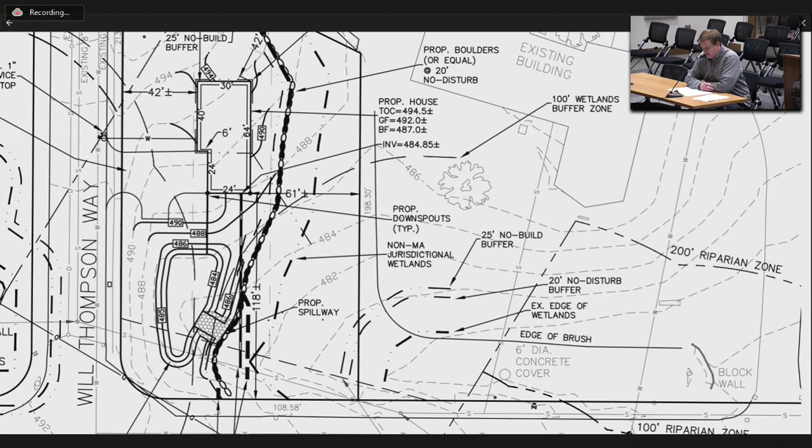We point that out on the lower right-hand side of the screen in front of you, and it would lead down toward that drop inlet adjacent to the retaining wall. There was another area, the man-made drainage channel that leads from the parking lot down toward this swale along John Fitch Highway. There was some question about whether or not that was a wetland or how that fell within the jurisdiction of the commission. So what we agreed to do is flag that as a non-MA jurisdictional wetland at this point.

We show the 20-foot no-touch buffer that the city has, also the 25-foot no-build zone with that. And as part of that no-touch zone, there was a request by the commission that some kind of monumentation be put along that 20-foot no-touch zone, so that it's delineated for the homeowner in the future that the area between that and the existing drainage channel is not supposed to be disturbed.

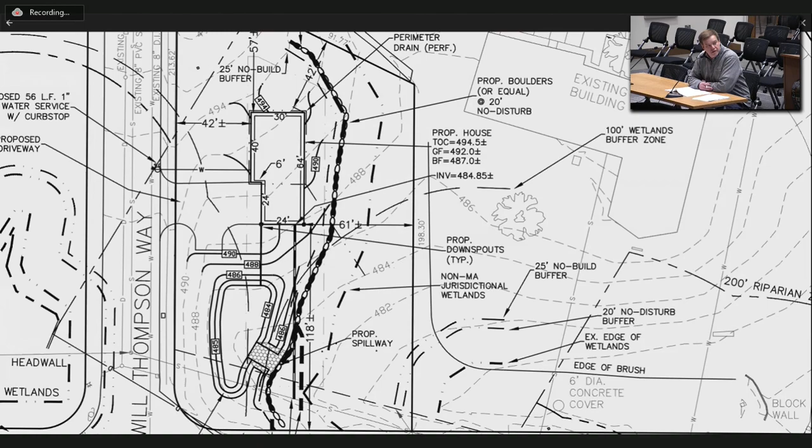So that's what we're showing on the plan - right now a boulder wall or delineation there, and we do show it as 'or equal.' I know in the past the commission has used a few different ways to delineate that 20-foot no-touch zone, so we want to leave that flexibility for the applicant to choose which monument option, as allowed by the commission in the past, would be easier to create that visual barrier for the future homeowner.

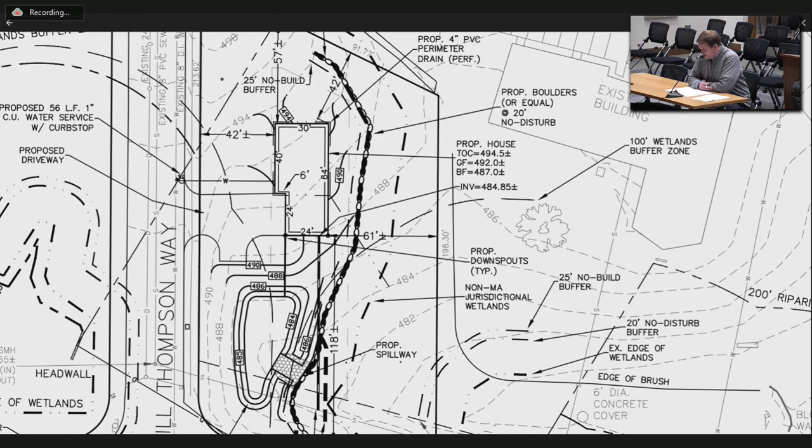We did slide the house up a little bit to the north, about 15 feet or so, closer to the northerly property line. This allowed us to create some more space on the southerly side to fit in the proposed detention basin out of the 20-foot no-touch zone.

We do show grading on the back of the property up to that 20-foot no-touch zone where it's field now, and it'll be lawn afterwards. Anything outside that 20-foot no-touch zone will be a lawn area or even some of the field area like it is now, in the northerly corner.

We feel that the proposal in front of the commission is what the commission members were asking for at that site walk. I think it meets what the commission members and Tim were looking for from a standpoint of protecting that drainage channel that has some wetland plant species in there now, to allow it to continue to operate the way it is.

One thing we do ask, and we talked about on the site walk, is that the drainage channel still be allowed to be maintained if any silt builds up there, or anything stops it from conveying the stormwater the way it does now, so the landowner or the church has the ability to continue maintaining it, making sure there's no blockage within that drainage channel that would negatively impact their parking lot to the north of it.

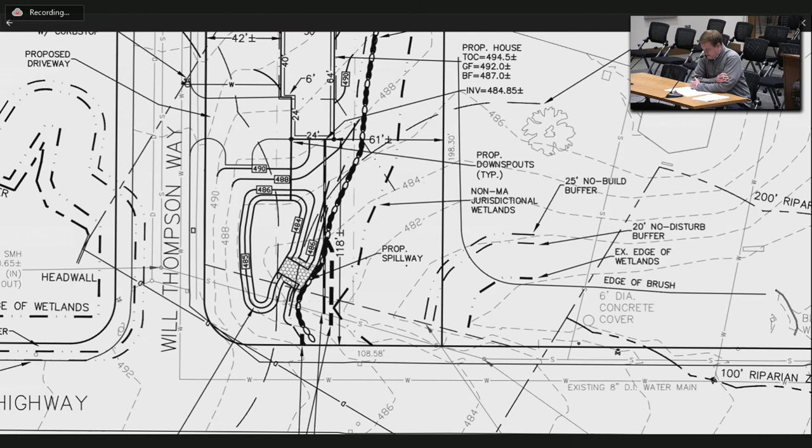They would do a minor trench to get that sewer service in, then restore the trench and make sure it goes back to a field as it is now. But because of where the sewer inverts are, the sewer elevations within that sewer run, and where the sewer ideally would want to come out of this house, it makes sense to tie in the sewer in that location, so as not to negatively impact the detention basin.

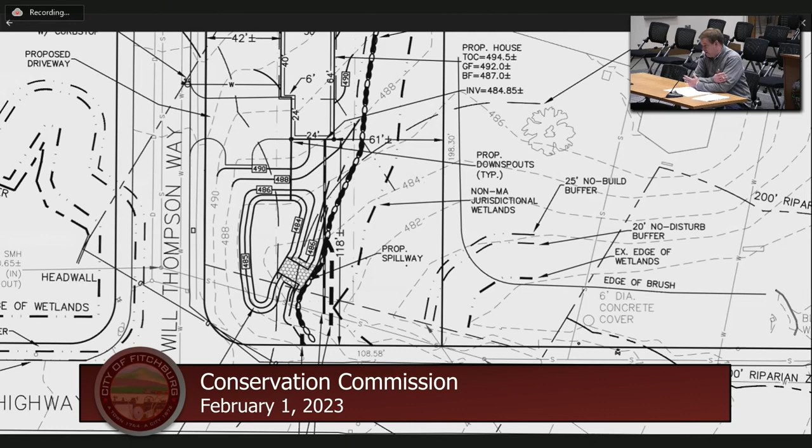That was one thing I wanted to point out to the commission. Like I said, after construction is completed, that will go back to what it is now, really that field meadow area, used as a drainage conveyance channel. I'm not sure if any of the commission members have questions or comments.

Madam Chair? Yes, I just have one real quick question. So out in the field west, we moved some stakes around. Is the delineation shown on the plan consistent with where the stakes were moved to?

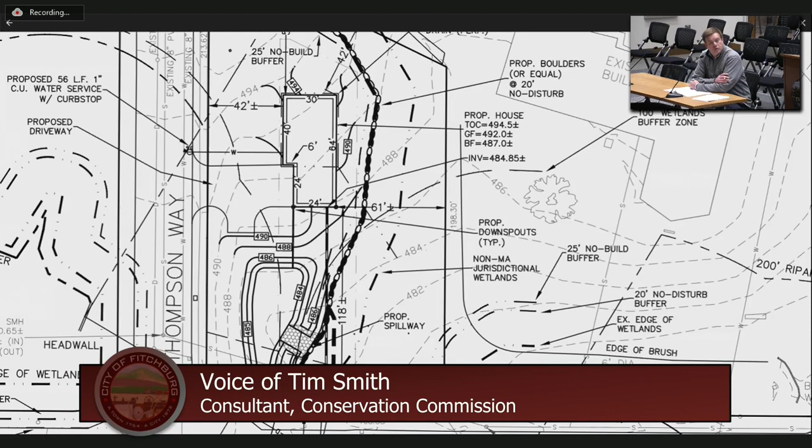Correct. What I did is I left those stakes where they were. Matt went out and looked at where the stakes were. He didn't have an issue with the stake locations. He threw a couple extra flags intermittently, because the stakes were spaced 20, 25 feet apart in a couple locations, so I think he threw one or two flags down.

And then in the lower area where we show it as an actual jurisdictional wetland, he threw, I think, 5 or 6 other flags down in that location along the swale along John Fitch Highway. But yes, the stakes that we put in the ground during that site walk, Matt did verify those, and he was comfortable with the locations.

Very good, thank you. And there were a couple areas where he thought he could move it a couple feet here and there, but it didn't really matter at that point. We left it the way we staked it because we don't want any conflicts with regard to that — it didn't make much of a difference, a couple feet here and there.

I think one of the commission members had a... would anyone like to speak in favor of or against this hearing, or would like to request more information? Please state your name and address for the record. Do we have anybody in person? Please, come on up here. Thank you.

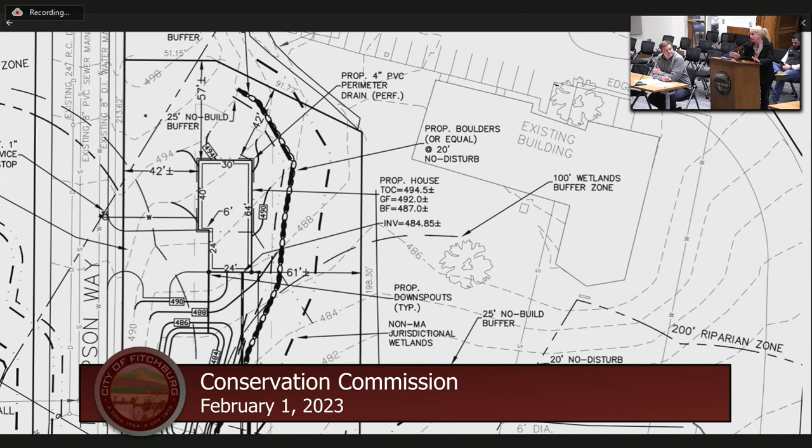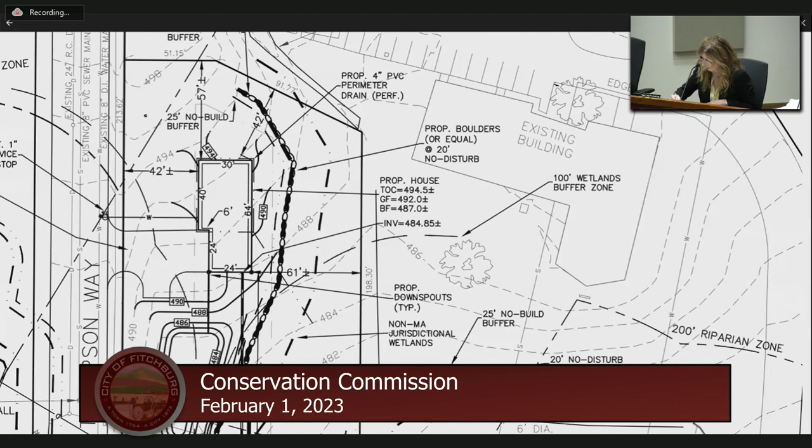Hi, can you hear me? Yep, you can now. Yeah, thank you.

I was listening to the person that spoke earlier too, and I'm looking at the driveway here. A lot of what he was saying about the driveways up on McIntyre was that after they were put in, the water was forced to go a different way and it came across the street. I think that's what the people on Will Thompson are thinking, that the driveway and the housing, even though the water doesn't go that way now, when you build, and you'll probably have to blast because of the ledge that's there, it will go across the street.

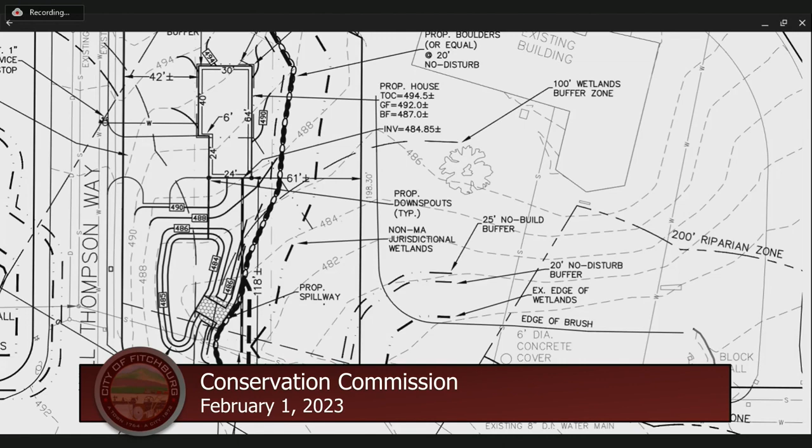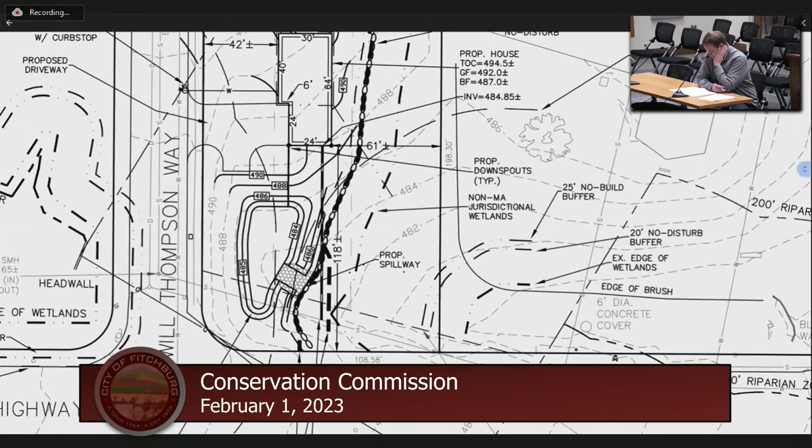Does this culvert at the bottom down towards John Fitch go under the road and then into the pond, or does it just go into the sewer? There's a culvert underneath, from Will Thompson to John Fitch Highway, and into Falulah Brook. That connects the two sides of the river there. Then the river eventually goes down to the little pond, to Putz Pond.

We're not touching that culvert. We're not touching that section there.

Just so you know, the driveway grading is proposed to continue the water flow in the direction it does now, where it stays on the property and toward that drop inlet at the driveway into the church. We're not required to force our driveway runoff into that detention basin. The high point in the street currently along Will Thompson Way, along the right-hand side, basically the backside of the property the city owns, is going to stay there, and all the water currently on this property goes toward that catch basin or drop inlet next to the driveway for Emmanuel Lutheran Church, and that's going to continue after this project.

And also the buffer zone - is it going to be 25 feet on that lot from beginning to end, or just behind the house? There's a 20-foot no-touch buffer required by the city, and we're providing that. The 25-foot no build is no structure - we're not in that 25-foot no structure zone, but we are doing some grading within that 25-foot no structure, no build zone.

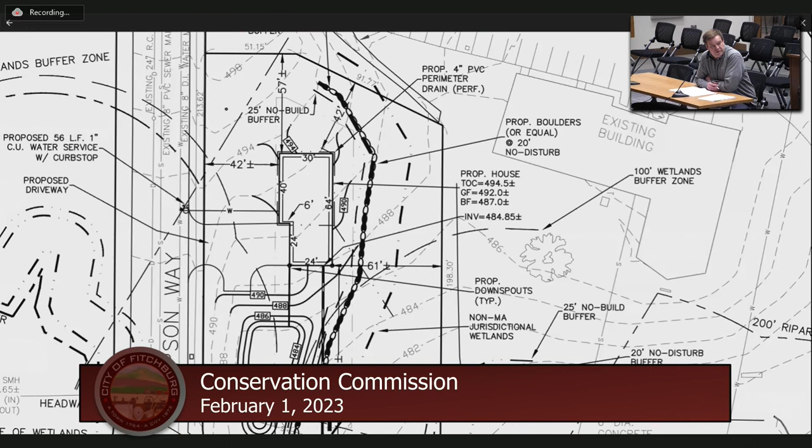And those boulders that are going down, they're not the little chain link thing - that's just there to provide a physical monumentation of that 20-foot no-touch zone so that the future homeowner will know that's the limit of where they should be disturbing, the limit of where they should have their lawn. I have that across the street from me here.

Does the commission have a standard condition now for how you would handle that? I think that's worthy of discussion later, is that what the commission wants? That was my question.

Is Mrs. Solomito done? Yeah, that's okay, I'm done. Thank you. I did have a question about that barrier. But do we have any other?

I'm not seeing any other hands raised unless Matt has something to say. Mr. Morrow, good evening, do you have anything you'd like to add? Can you hear me now? Yes, now we can, Matt. At this point, no, I have nothing to add. I think Wesley covered it. Thank you.

Okay, hearing no more from the public, let's turn to the commission. Do we have any commissioners that have questions they would like to direct to Mr. Fliss?

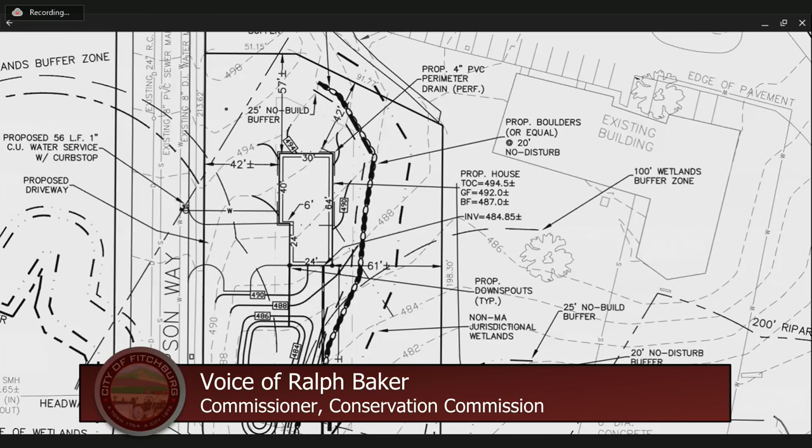I do, go ahead Dr. Baker. Mr. Fliss mentioned something about a sewer line. I don't see in the plan that is appearing right now on the screen any indication of where that sewer line is. Am I missing something?

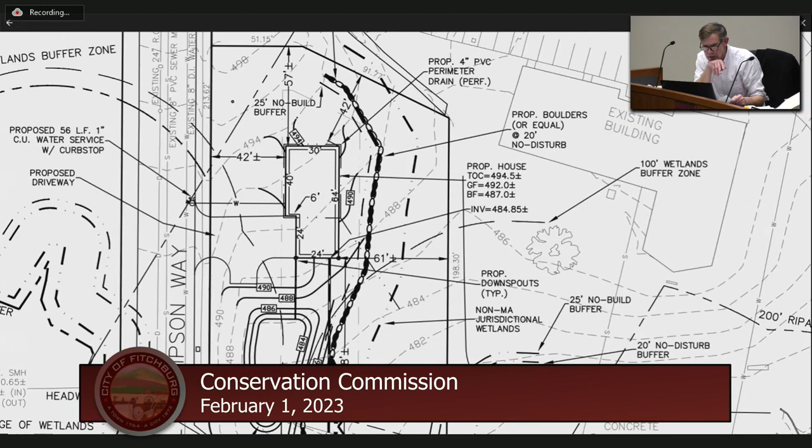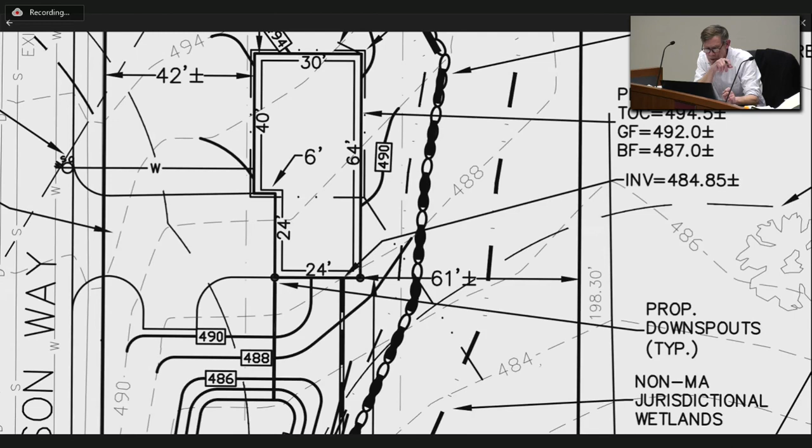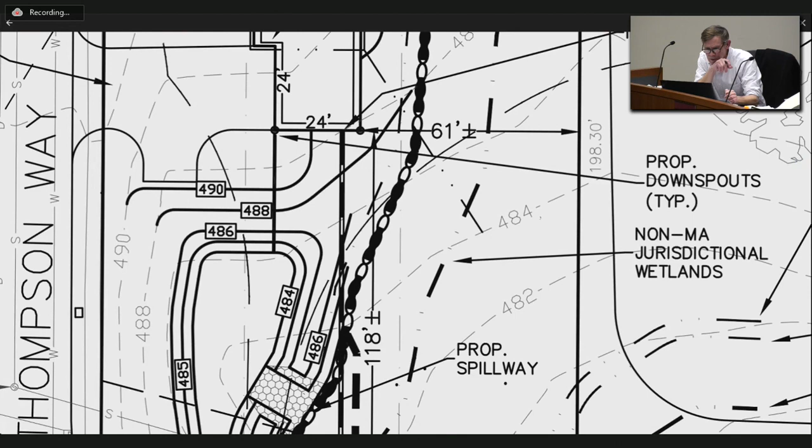Yeah, it shows - there's a dark dashed line running from the side of the house with the dimension 24, going straight down the screen, on the right-hand side of the house. There's an existing sewer main that runs underneath, and we're just tying into that. It's labeled at the bottom there with an invert elevation. I see, okay, thank you.

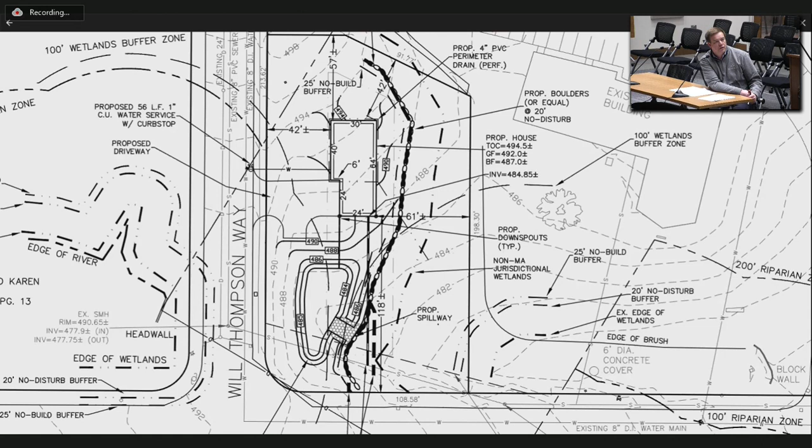Like I said, once it's installed, they'll restore that property back to where it's supposed to be. It's not exactly intuitive, Joyce, trust me, trying to figure it out.

Are there any more commissioners that have a question or comment? Joyce, go ahead, Commissioner Jacobs. Wes, thank you very much for updating the plans. I just have a couple of questions.

When you say boulders or equal to, are you leaning towards one or the other? There was a lot of conversation about this, I think you guys had mentioned there were a few different ways you've done it in the past. There were granite pillars installed that we did at another applicant.

But we also want to make sure that when you do that, we will put in perpetual conditions that somehow it has to be memorialized with verbiage attached to that monument or those stones, saying it's in the resource area, no alterations. Do you guys have something similar, like a little placard? I know some communities have.

Yeah, we do. We have a box of them in the office. And that's fine, whatever we put out there, we'll make sure we have the little placards on there. We don't have an issue with that.

Okay, beyond where you're showing the stone now, I'd like to offer that we also memorialize that 25-foot no-build, at least in two locations on the church side. When you get to the 25-foot no-build buffer there in two locations, so that someone's not going to come down into the wetlands and alter that, now that we've marked that off as a no-build area.

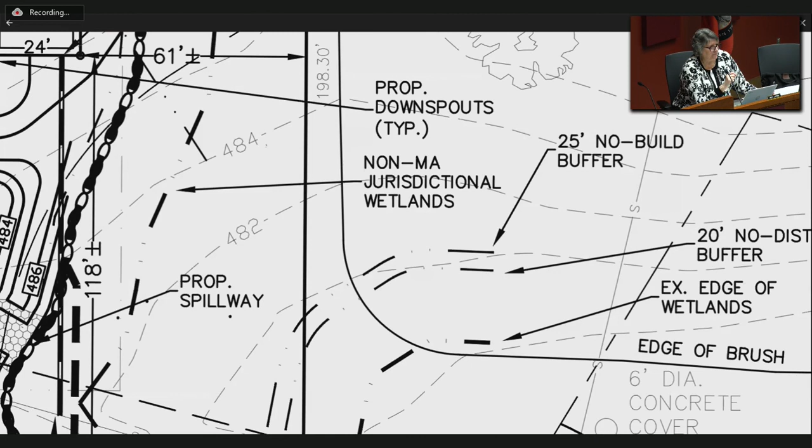Right there on the screen, where it says 25 foot, so as you go across, we would want a marker there. We would want to mark the 20-foot though, because at the 25-foot they could technically put a... I would say 25 foot, because it says no build, they're not going to be able to do anything anyway.

If you look at the definition, no build means no building or no structure. The way the regulation is written, the no-disturb zone is the area they can't touch, so we should do it at the 20 foot.

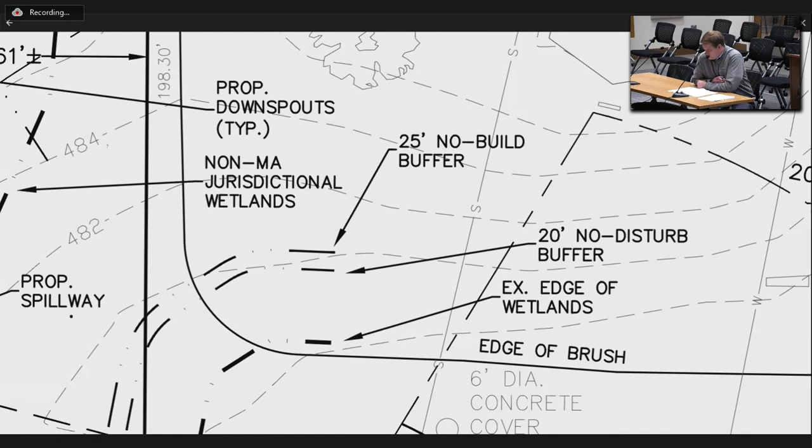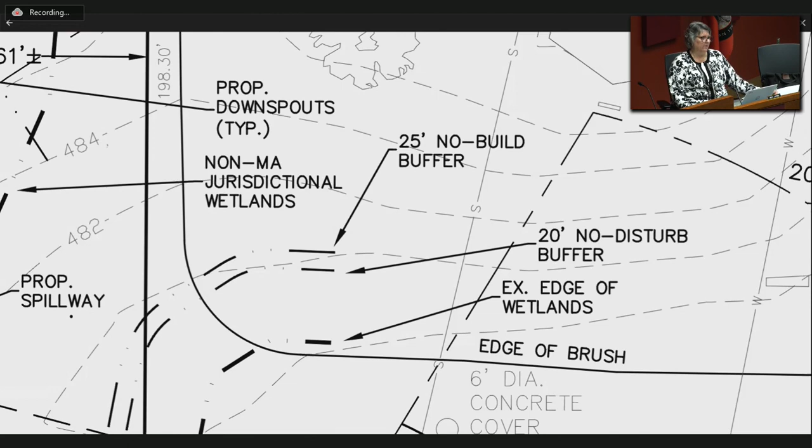I'd like to see at least two markers in that area, because that's a fairly long stretch. We'll go over the plan so that the final plans indicate that, so you can put one where your arrow is right now, where it says 25-foot no build, and then come down towards the driveway on that same plane and put in the 20-foot buffer mark there also.

So that we're delineating that buffer, and we will include in the perpetual conditions that they, as we talked about, can mow it or clean it up twice a year, so that it can be maintained, both the drainage that comes down from above and this area. The drainage basin will need to be maintained as it was originally designed.

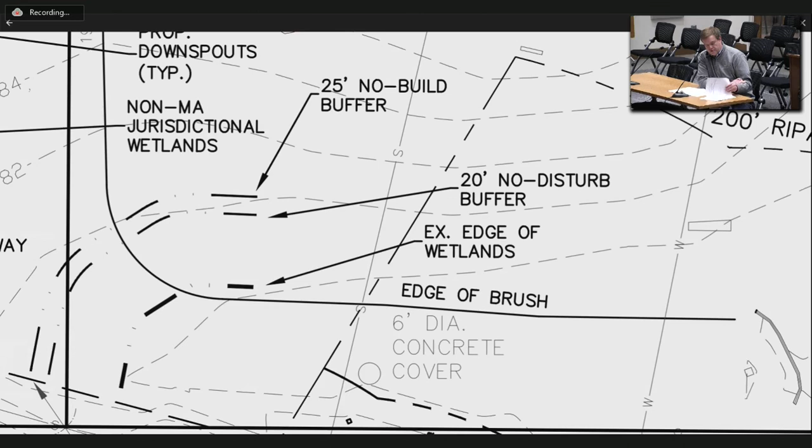That'll be in the order of conditions. And so we did provide a maintenance schedule for that basin, when I sent over the calculations to Nick I also included a maintenance schedule. I know in the past the commission has just included that as part of the order, I'm not sure if that's something you would do again or just reference the drainage calculations.

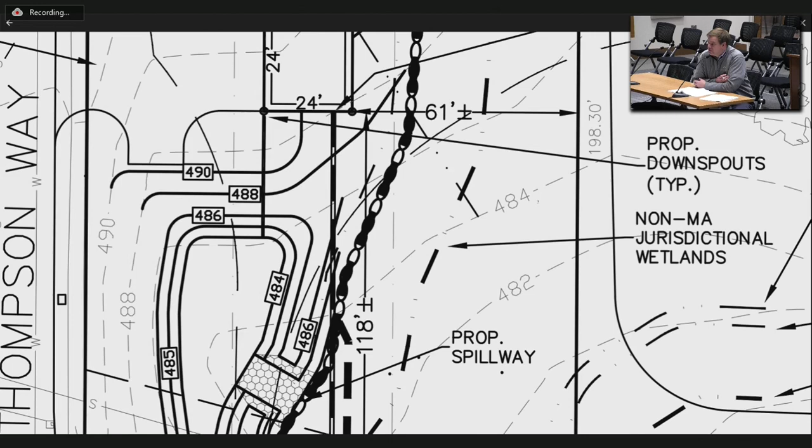Well, Nick is here. I know he sent me an email toward the end of the day saying that because of the winter conditions and storm damage and cleanup, he hasn't had a chance to really review, nor has Jeff, the calculations that you sent him.

I know, do you want to hear from Nick? Sure, you still with us, Nick? Yep, I am. So I took a really quick look at this this afternoon.

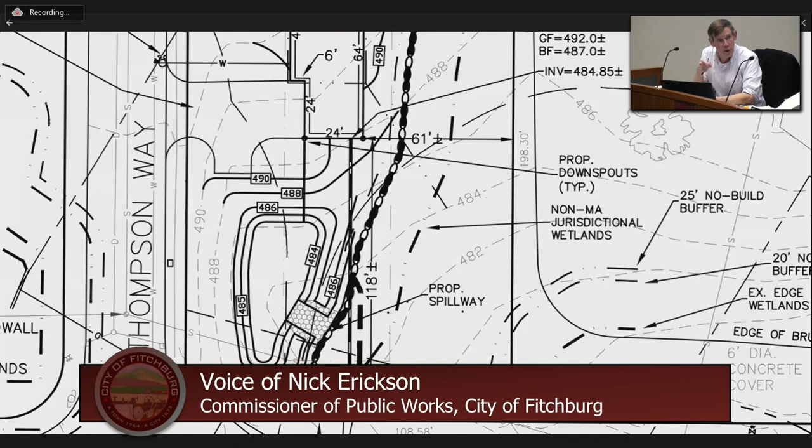I'm fairly comfortable with everything that's shown. I would like another day or so to go through the actual calculations and just make sure everything's in order, but I expect to have some time to do that by the end of the week. So assuming everything checks out, I can just send an email to Mike and Mr...

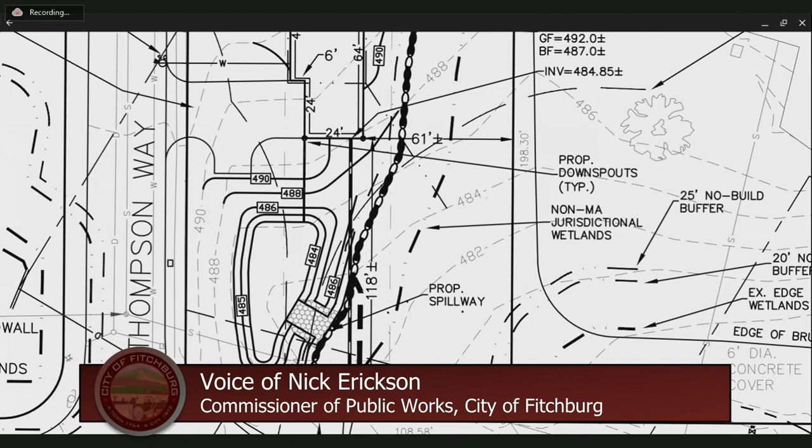Fliss, let them know that everything's okay. If I have any other questions, I'll email and get them clarified. But just from a 1,000-foot view, everything looks good so far. Best send it to my Gmail account, Nick, because they're going to turn mine off, okay?

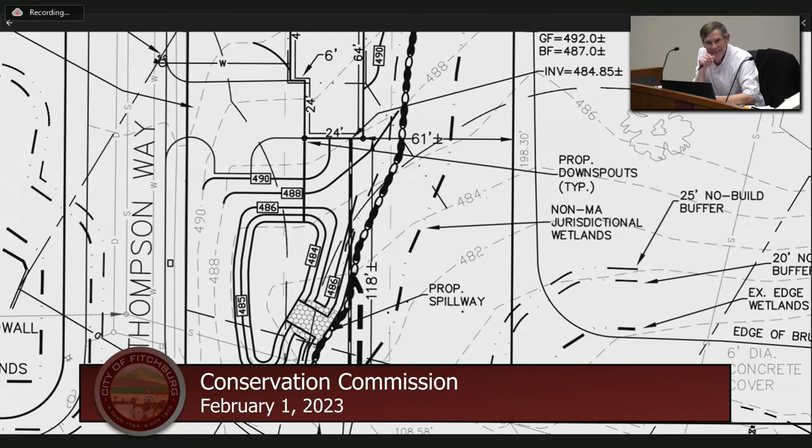Wes, can we also put a marker on the plan, in and about where the elevation mark is for the 490, which is just near the detention basin, that we're going to instruct as part of a condition should be marked as an area where no alterations are to be made.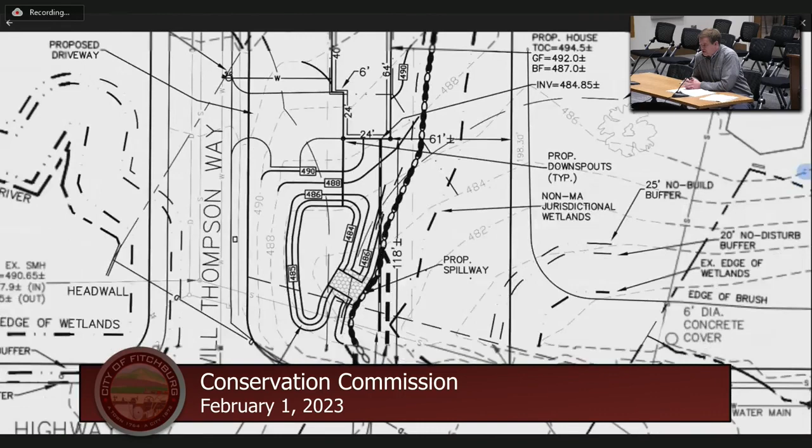It's going to be in the order of conditions. It's going to be lawn, so anything outside the 20-foot no-disturb zone to the wetland, we have no problem. But now I'm talking about around the basin. They should be allowed to plant if they want, or landscape up on top there.

We talked about this when we were there. They should only be able to maintain it a couple of times a year just to keep the overgrowth down. Between the 486 and the 490, it's going to be lawn, so they should be able to mow it when they mow their lawn. It serves no other purpose other than just lawn at that point.

The basin part of it is 486 to 484. That's the basin part, usually maintained a couple times a year, allowing it to grow a little more wild. But anything above it doesn't serve any purpose from a drainage standpoint, so I would ask that to be just lawn, so they can maintain it as regular lawn and it doesn't look unkept.

So how do we let the potential homeowner that's going to take over this lot know that it cannot be altered in any way?

Well, it's going to be in the order of conditions that the drainage basin shall be maintained as originally designed. Are we comfortable that that's enough? The maintenance plan can be attached to it too, so they know what they're supposed to be doing for the maintenance of the basin.

But that part that you're talking about is the lawn. That's part of the lawn, has nothing to do with the basin itself.

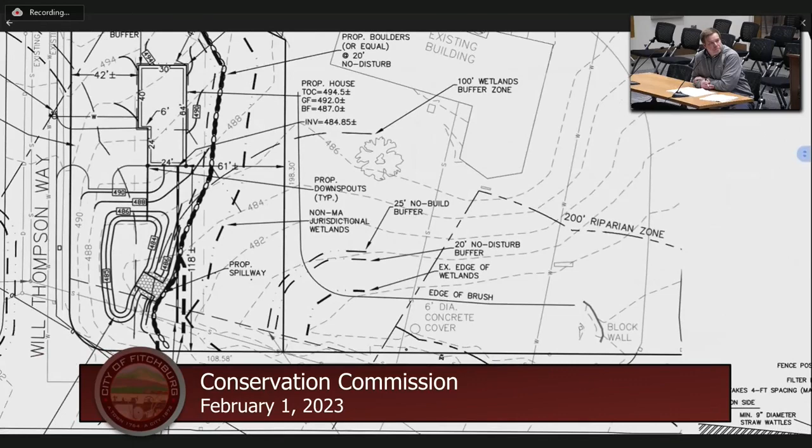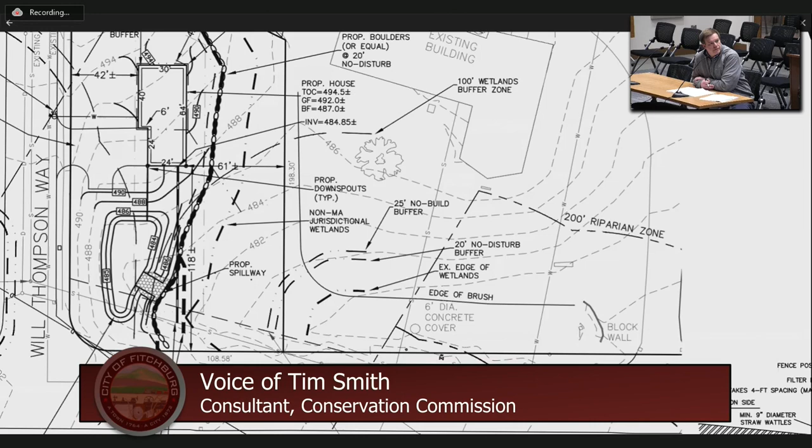Joyce, I hear what you're saying though. We had another project where the homeowner brought a lot of fill in and filled the detention basin to plant a garden. A lot of folks look at it and say, I've got a hole on my property. But that detention basin is going to be vital to prevent the flooding that the neighbors are concerned about.

So it does need to be protected in perpetuity and maintained. The only place they should have any monumentation is at the no-disturb zone, outside of that no-disturb zone. But we can put a perpetual condition that says that detention basin should remain, and that the maintenance plan should be adhered to.

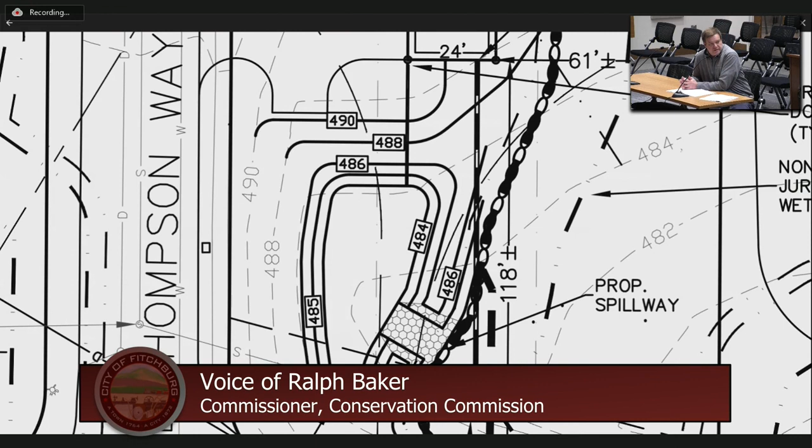So, Tim, can we get an agreement as to what can be considered the detention basin and what isn't? Would it be the 486? Yeah, 486 is the contour of the basin. Okay, that seems reasonable. Plus the spillway, correct. So that should be clarified within the order of conditions, I think.

Detention basin and spillway, Dr. Baker? Yeah, as designated by the 486 topographical line on this plan, which of course could be reestablished with a survey if you're wondering where it was, but also you can just tell because the slope will drop off there. And Wes, I know this is all going to come with the lot, but...

As Tim talked about, a lot of people don't read that stuff, and they think they've got a depression in their yard, so they want to fill it in and plant a garden, and we don't want that to happen. So I'm trying to figure out the best way to make sure that information is relayed to the new owner, no matter what we're talking about, basins or backyards close to wetlands.

If the homeowner doesn't know about this from day one, a lot of times you have issues. It could be a matter of just filling wetlands. So I think making sure it's in the deed, and then making sure that's always conveyed in the deed. A lot of times the order of conditions is going to show up when they do the title research every time they sell this property. So yep, it's usually a red flag if there's an open order or these attachments. The property owner should be aware of it.

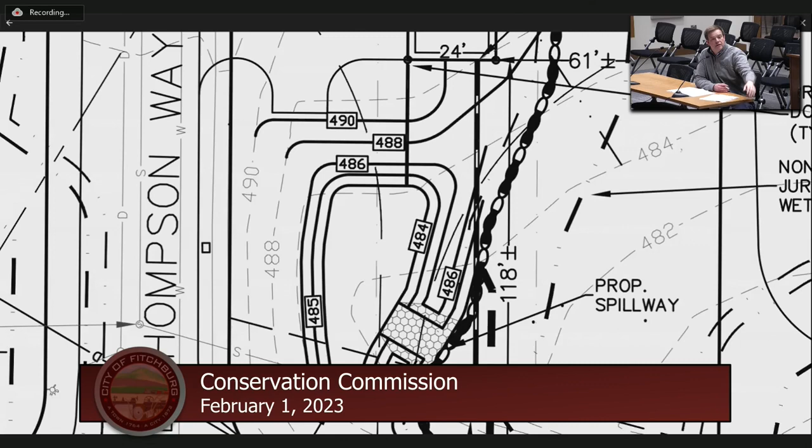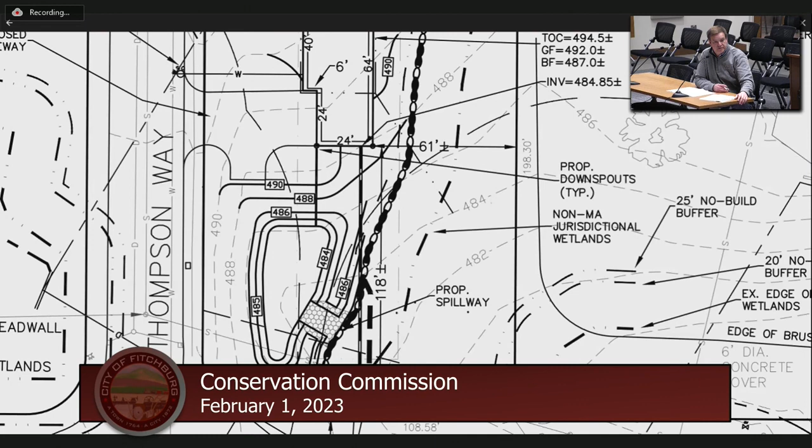Second, you mentioned having to build a trench to get into the sewer. So when they put the sewer in, they'll put a small trench in, lay the sewer service, fill it up, and then reseed over it. Are you giving us some information about how you're reseeding that, or some specifics? If you want us to put a certain type of seed mix down, we could do that. And to be honest with you, because they're not going to mow it as often, the rest of that area is going to overtake it like it already has.

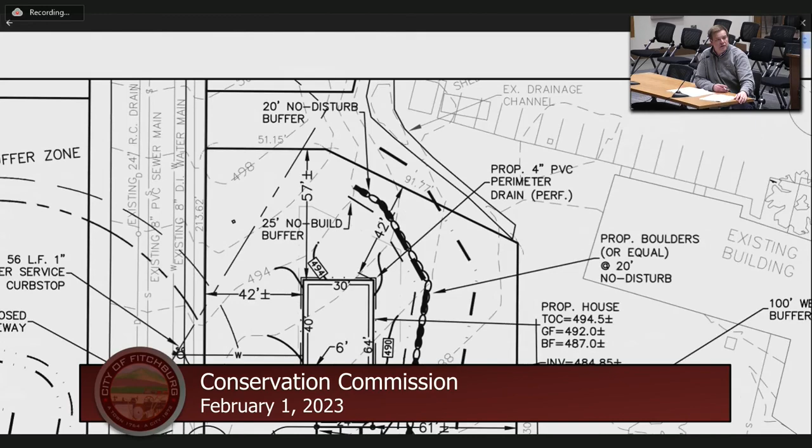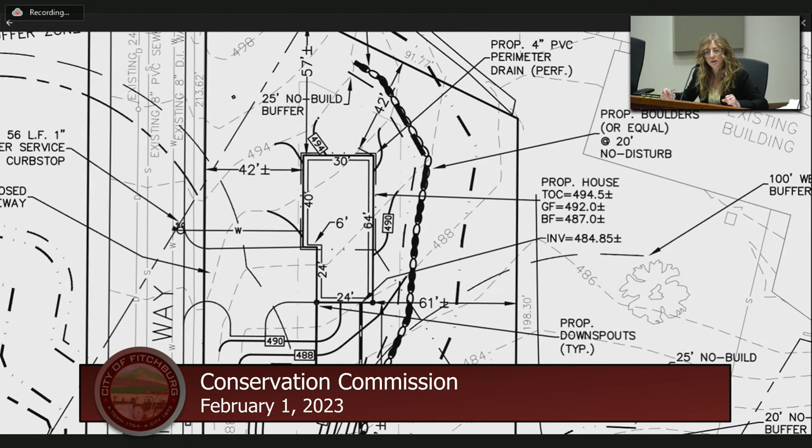And then lastly, on that visual barrier, perhaps you can elaborate. I thought I heard you say you were going to wait until the landowner decided. Our initial thought was to do boulders. I think Joyce had brought it up in the site walk, that you could put a row of boulders out there. It's not extremely obtrusive from a visual standpoint, and I think it fits into the natural look of the site. I think it's probably a little cheaper than the granite post, which is more expensive than boulders. I know there was some rock out there already on the site in a couple areas, so they might be able to use some of that natural rock to make this work.

But did you say you were going to wait until the homeowner decides? I wanted to give the contractor the ability—if you guys are okay with granite post and they want to use granite post, have them use granite post. Or if they're okay with a rock wall, use a rock wall. I think if a contractor has access to boulders, honestly, boulders are probably the way they'll go, and that's why I think it makes more sense. If they don't have enough boulders, or boulders are more expensive for some reason than granite, then maybe they'd want to do granite. I just don't want to have to come back here to ask for granite—I'd rather they have the few options you've allowed in the past. That's all, I just wanted to make sure it happens. Yeah, we want to make sure it happens too.

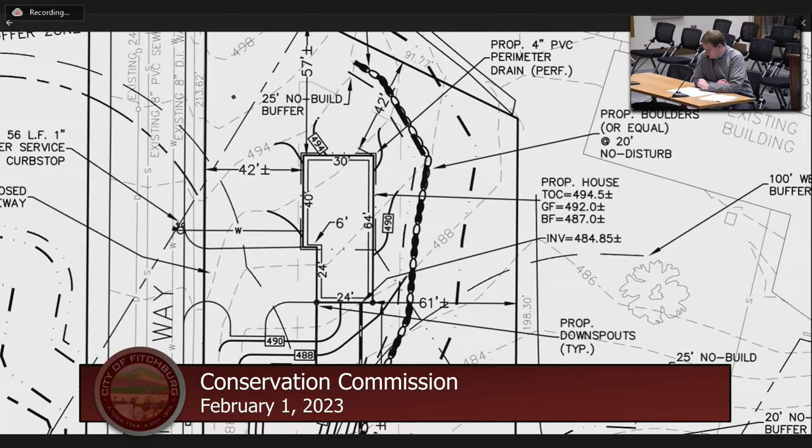Do any commissioners have more questions? Hearing no more from the public, the chair closes the hearing for the notice of intent.

Emmanuel Lutheran Church, 1200 John Fitch Highway, proposed single-family dwelling. Do we have a motion and a second to accept the notice of intent, pending review by Commissioner Erickson? I would say to issue an order of conditions pending a satisfactory review by the DPW commissioner of the drainage calculations that he received yesterday.

Madam Chair, I would make that motion with the approval of Commissioner Erickson, with our standard conditions that normally apply, plus I would like to see perpetual conditions: one, the drainage basin shall be maintained as originally designed, to include the spillway and all surrounding area up to the 486 feet elevation. Two, the area surrounding the drainage basin and the drainage ditch can be cleaned and mowed no more than twice a year. Perpetual condition number three, permanent markers, either boulders or barriers, to be installed along the east boundary shown here, to include placards indicating a no-alteration area.

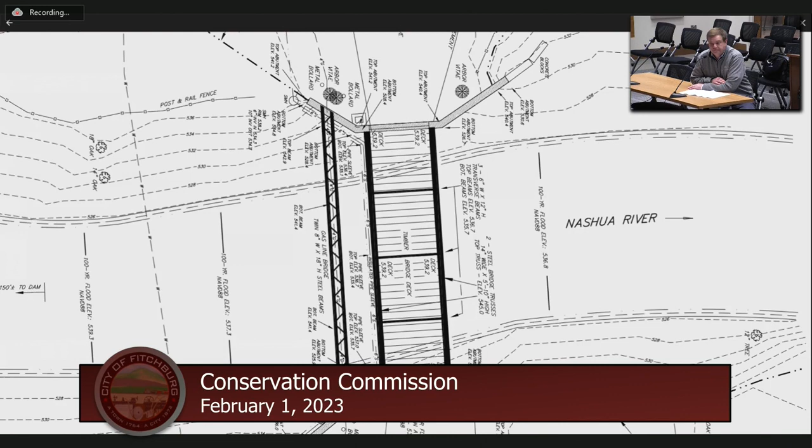We'll get the notification out to the abutters. As Mike said, we did submit the plan. I think Jamie Rowe from our office, if you're okay with that, will send the notice of intent to the state and send over a copy to Mike, and get that process rolling. Then we can come back for an official hearing in March. Sounds like a plan. Thank you. Thanks, Wes.

Can I ask a quick question? Do you need anything for, I think the next item on the agenda had to do with our friend over on Rindge Road? Is there any update since last month? The only thing I know is that they will be filing soon for the special permit for the earth removal. They've been shut down by the building inspector, pending an earth removal permit. Right, for the special permit.

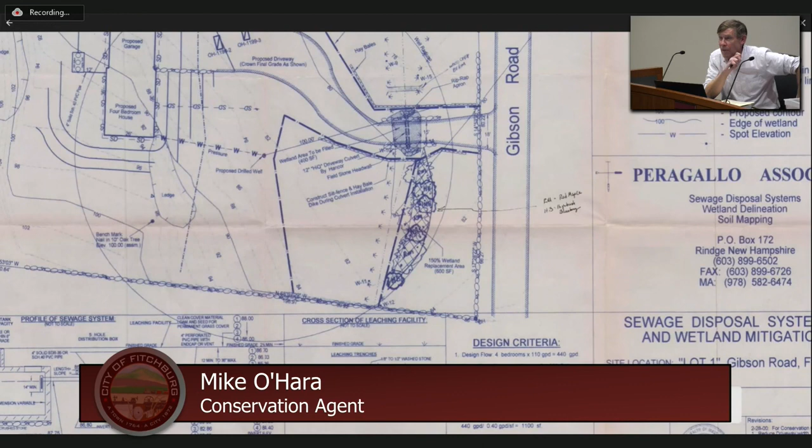Could I give a little background, in case you're not aware of everything that happened before? Back around 1999 or so, there was an order of conditions, prior to my time, I'm not sure if Tim remembers, but it was issued for a single-family house here and that driveway crossing, likely from the '99 plan. Order of conditions was issued, nothing ever happened with the lot, and the order of conditions expired. In 2005 they reapplied.

That might be the '05 plan. They got another order of conditions for the driveway crossing and the proposed house location, and got an extension of that order of conditions, but nothing happened. It languished, the property went into tax title, and it was sold at a tax title auction by the city treasurer several years ago.

I forget exactly which one, and it was acquired by a local person. Prior to transferring this property to the current applicant, Mike, he asked for a certificate of compliance for both of those orders, the kind where you check the box saying it's invalid because it expired and nothing ever happened. So that cleared up the title for you, Mike. Now we have a very similar application for a driveway crossing across an intermittent stream.

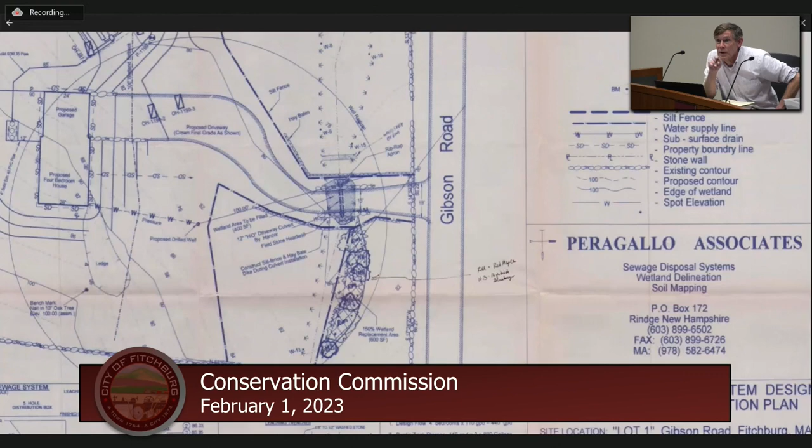Thank you. And that, just as an example, I think was one of the previous plans. It's not the latest plan that Mr. Popham had submitted - that comes later on the list. I only saw the older ones, Mike. No, you see the bottom two, septic plan. Oh, okay, that's the details. The one just above that. So, bingo, there you go.

So to orient - on the bottom left, the southwest corner, there you see Gibson Road. And the driveway is pretty much in the same location as previous plans. You see that intermittent stream noted, and wetland 2, wetland 3.

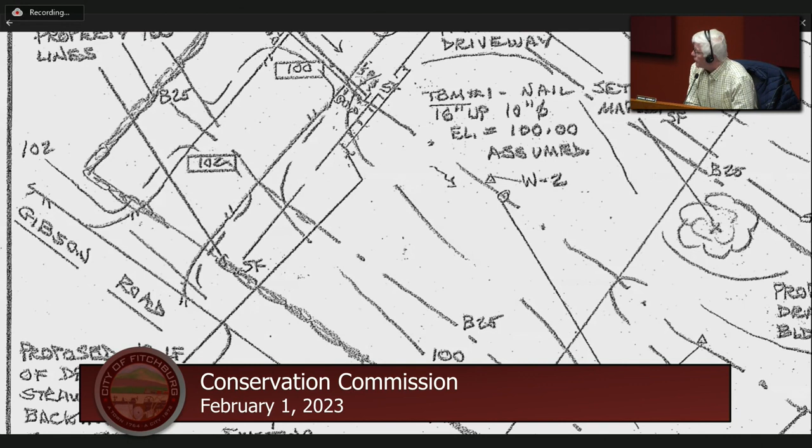In as much as the last time this came before the commission, and the commissioners are pretty much new, I'm not sure that there's a lot of significance to previously submitted plans. So a presentation on the existing plan to the current Conservation Commission members is quite in order. My engineer can best explain everything to you and answer any questions you have.

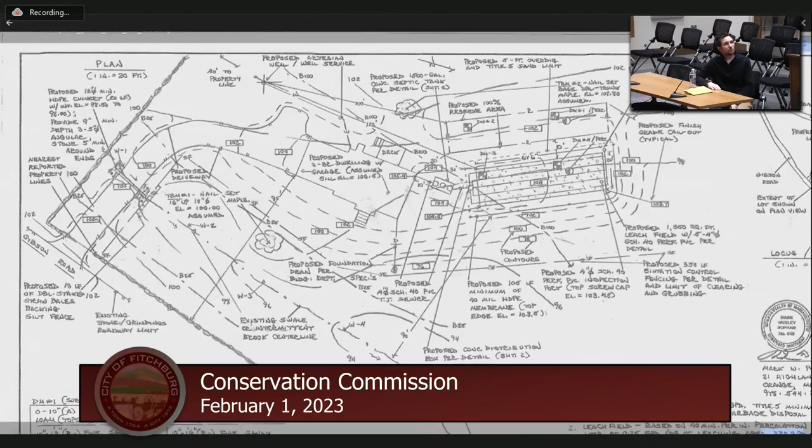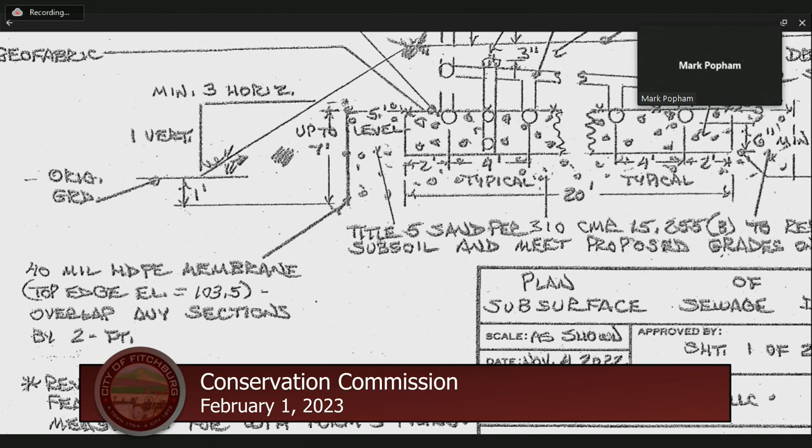I had a question - is this the 1999 plan? No, this is the current plan that Mr. Popham prepared. Yes. Mike had me take a fresh look at this site. Quite honestly, I went into this project with him without having the benefit of any prior plans. So we took a fresh look at it, including starting from scratch on subsurface testing for the Title 5 system, as well as finding the optimum house location.

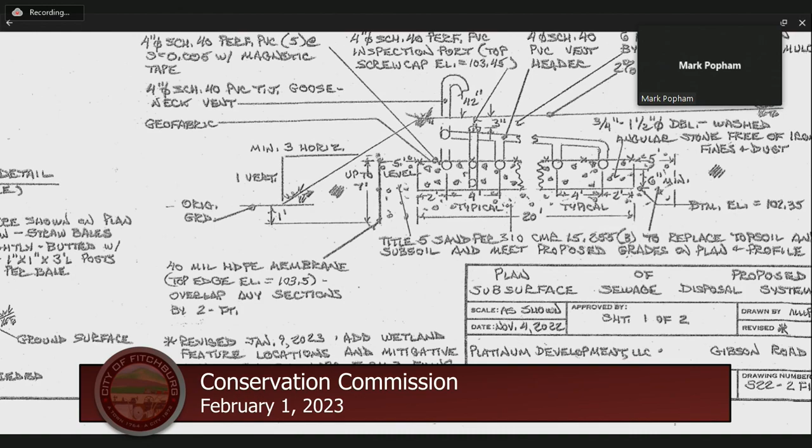There is a fair amount of bedrock outcrop in the rear of this lot, so it benefited the site planning to take a good look at the surficial and subsurface conditions, as well as being cognizant of the wetland feature, swale or intermittent brook, toward the front of the site. The driveway location, quite honestly, was selected partly because there's a slight opening in that stone wall in that vicinity already, and also it would involve less of an amount of fill to get a trafficable driveway across to the upland area of the site.

I think it showed on the prior plans that it was maybe another 80 feet or so toward the northerly direction. So the intent was obviously to put the septic system where it could best go, and then we determined the house location from that, as well as where there was any shallow ledge or outcrops on the site. That's what's necessitated us to have essentially the house and the driveway within the 100-foot setback from that intermittent brook.

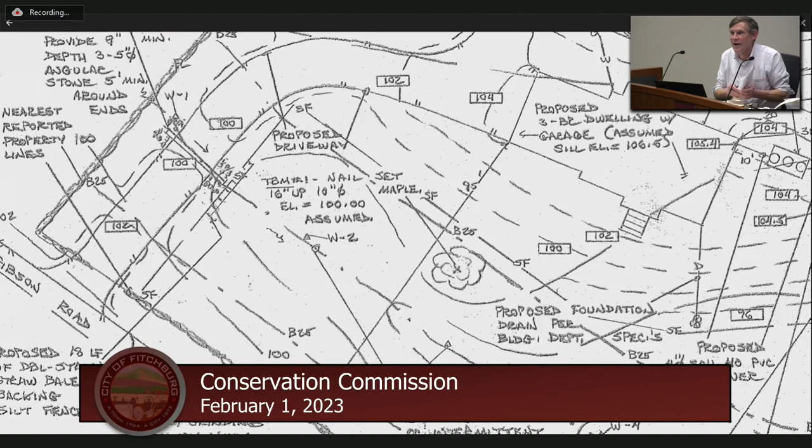I don't know if Tim has any. Mr. Smith, okay, so thank you, Mr. Popham. Let's open the floor for public comment. Would anyone like to speak in favor of or against this hearing, or would like to request more information? Please state your name and address for the record.

Seeing no one in person, do we have anyone attending remotely that would like to comment? The only name I don't recognize is Haley Dorsey, and I'm not sure what item that person might be here for. Haley Dorsey, what can we do for you tonight? I don't see that name on the list of abutters. But that doesn't really...

Hello, this is Jeffrey Dorsey, Haley's husband. We're actually the potential property buyers of this house, so we're just tuning in to kind of see how things are moving. Okay, thank you.

Mr. Smith, do you have any comment? Yes, I do actually. A few questions.

So what is the width of the driveway crossing? It's 14 feet wide, essentially 12 feet pavement width and probably a foot of crown or graded area on either side. Okay, and is the driveway going to be paved or gravel? Mike, you can answer that one. Paved, yep.

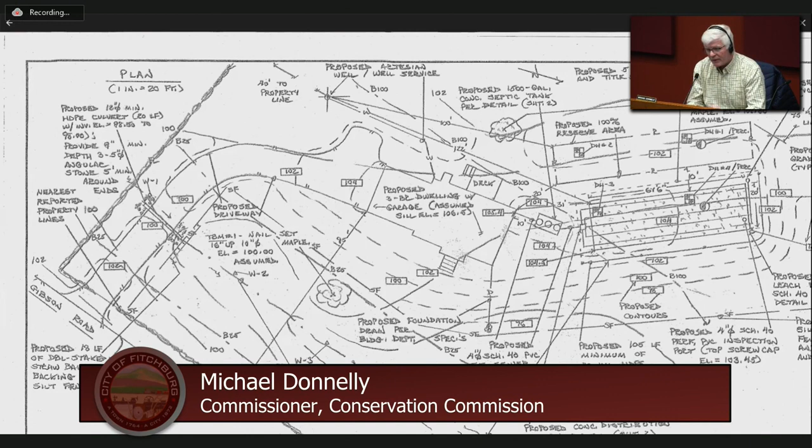Your application said 80 square feet of disturbance, and that would be the driveway crossing, as far as I can tell. At a 14-foot wide driveway, dividing 80 by that gives you so many linear feet along the driveway of disturbance. I want you to be able to defend that number of 80 square feet of disturbance when we're on site, not tonight.

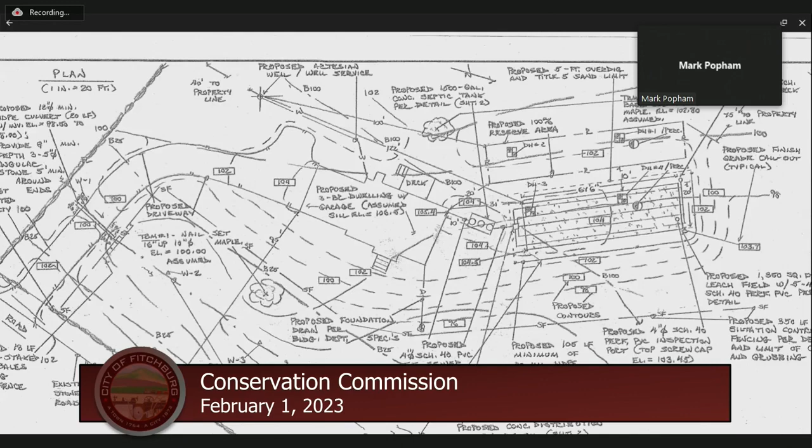Actually, what I said was 850 square feet of disturbance within the 25-foot buffer zone to the brook. The 80 square feet had to do with the area, the wetted area of the swale or intermittent brook. Land underwater, yes. And that's how it was checked off on the notice of intent.

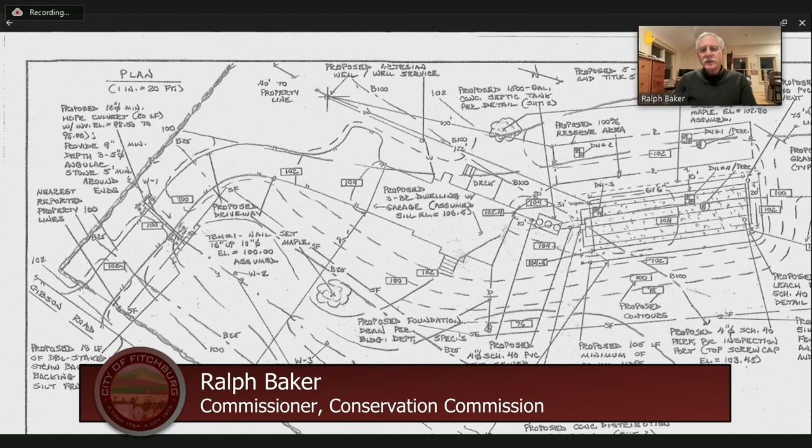Madam Chair? Go ahead, Dr. Baker. Seems to me that the onus is on the applicant to hire a wetland scientist to make the delineation. It's not on us. They need to have someone qualified make that delineation, and then after that we should have a site walk. It seems to me.

How do you want to move forward with this? I agree with Dr. Baker — typically we don't make that determination. The applicant makes that determination, and you bring us a completed application that has all that in it. We don't do it. Mr. Smith will go and review what your wetland scientist gives you, and he represents the commission's interests in that regard. Okay.

So do you need more time before we schedule the site visit? You need more time to make these determinations. Okay, we can't tell you how much time you're going to need for that. Generally we receive an application that's complete, and we make our determination. We'll go do a site visit, and we'll send our environmental consultant to look at it.

Do you have any more questions for us? I think I'm good. Okay, do we want to continue? Can we have a motion to continue this — at what point do you think you'll be able to get that information so we can schedule our site visit? I'll start working on that tomorrow, so I can schedule that, and then follow up if that works. It just depends on an environmental scientist's schedule to get the work done, then I can.